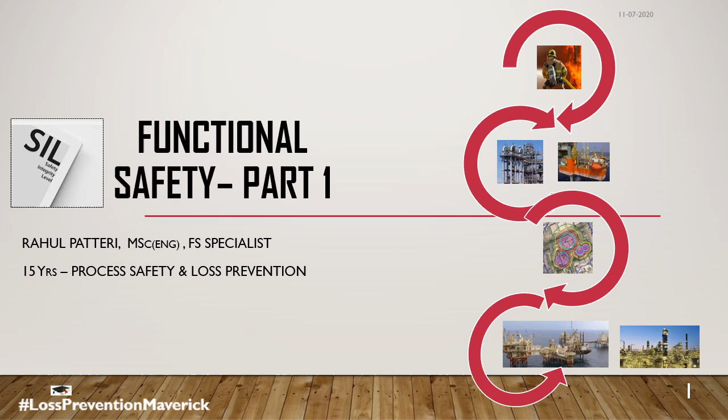So in this functional safety series, we would be talking about some safety concepts. We would be looking into an introduction to functional safety, certain things like LOPA, safety instrumented systems, SIF, the standards 61508 and 61511, what is SIL, that is safety integrity level, and certain salient features of the same. So part 1 of this lecture, we would be talking about these.

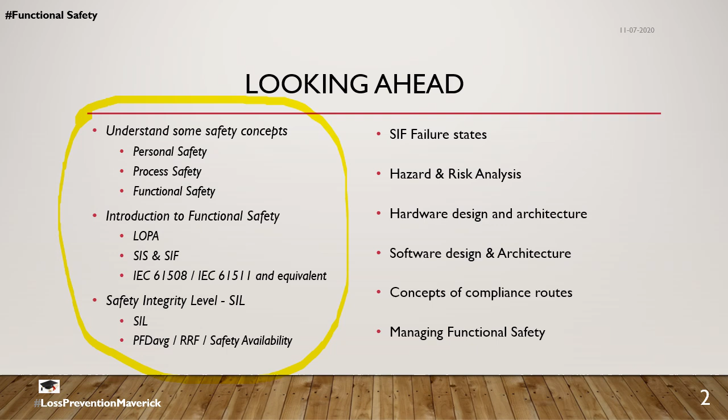Further, I hope and intend to make videos on SIF failure states, certain hazard and risk analysis, hardware design and architecture, software design and architecture, certain compliance routes that the hardware and software are subjected to as part of the standards, and how to manage functional safety. So now let's understand some safety concepts.

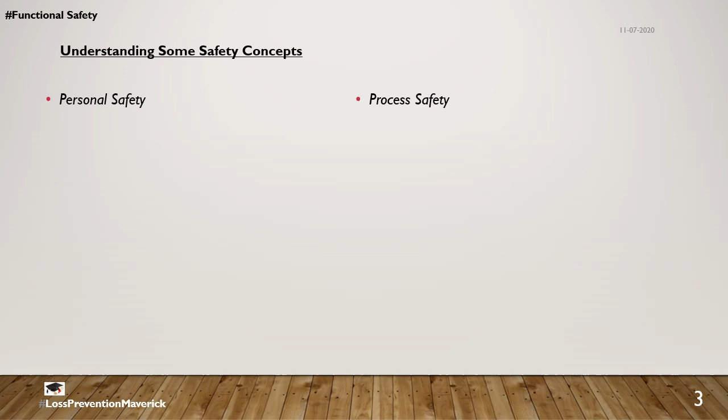So starting with personal safety and process safety. What are the differences between them? Personal safety talks about slips, trips and falls, whereas process safety talks about loss of containment. When the hazard which is supposed to be inside a pipe, called a primary containment, is outside of its primary containment, it is called a loss of containment, and the effects could be fire, explosion and toxics.

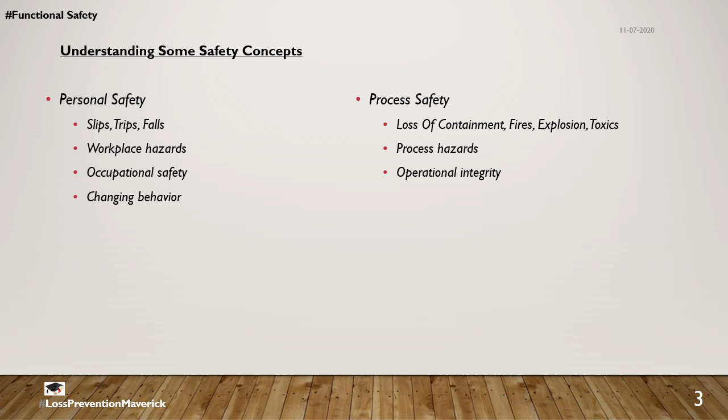Personal safety talks about workplace hazards, whereas process safety, as the name suggests, is about process hazards. Occupational safety is a subset of personal safety, and here operational integrity, people have also heard about asset integrity, is a subset of process safety. For continually improving personal safety, we have to have measures like behavioral management, behavior based safety is also being said. And for process safety, it's about changing the environment, the conditions.

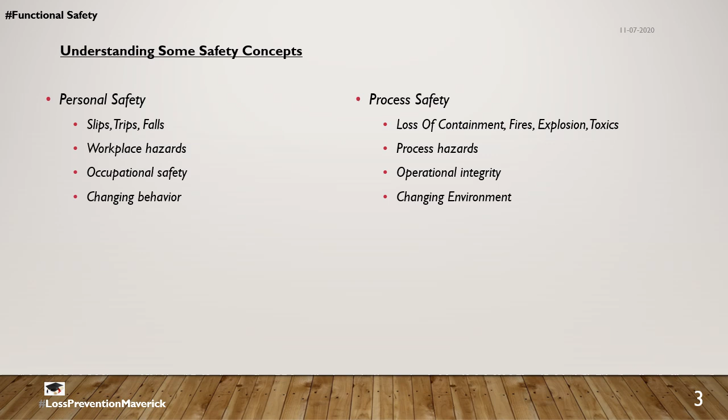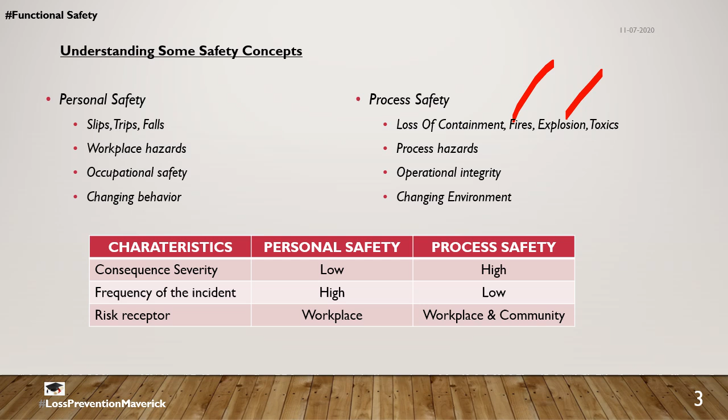If you look into the characteristics of personal safety versus process safety, personal safety has a low consequence, but it is very frequent, and the risk receptors are mostly within the workplace itself. If there is lifting and something happens, the consequence would be relatively lower, and the risk receptors are all those within the boundaries. Vis-a-vis process safety, fortunately it's not so frequent, but the consequence is quite high. Like we've seen, if it's a fire or an explosion, it is not something that will be confined within the workplace, but it can also go to communities.

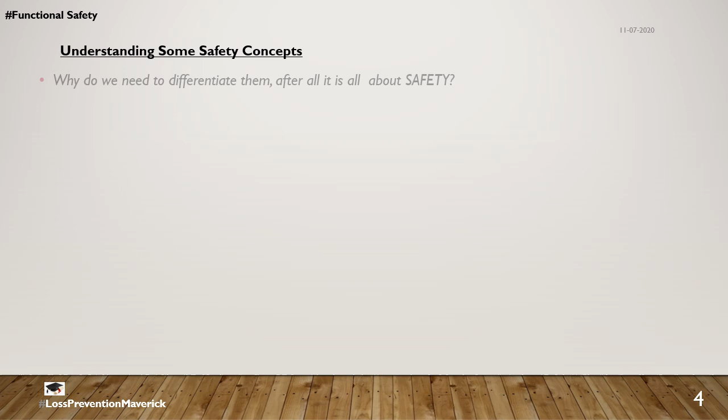So to continue, why do we need to differentiate after all? It's all about safety, isn't it? Well, this distinction is important because it has to be managed differently. When it comes to personal safety, usually it is something that we've heard about as the HSE management system, and it's focused on lifting, road safety, industrial hygiene and health, etc. And the risk assessments are mostly in terms of job safety analysis, permit to work, task risk assessments, etc.

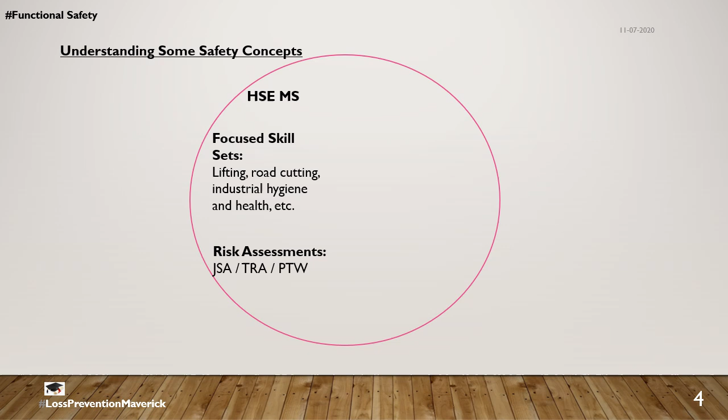Whereas for process safety, it's called process safety management. And the skills mostly looked into are ISD, which is inherent safe design, HAZOP, LOPA, that's layer of protection analysis, consequence modeling, etc. The risk assessments here are termed as QRA, FRA, emergency evacuation risk assessment, EERA, etc.

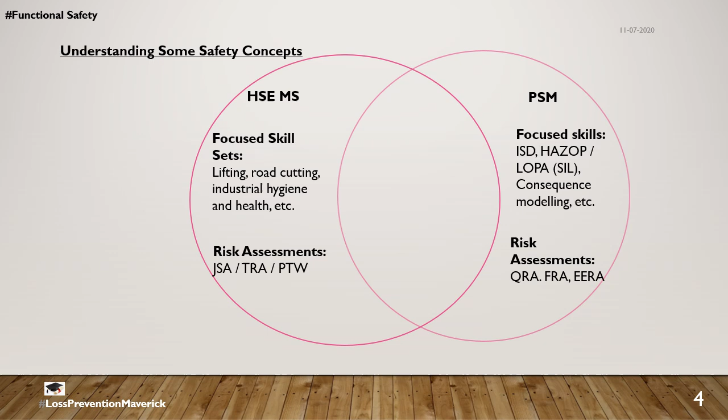Well, process safety and personal safety have certain common factors. For example, both of them need effective leadership. They both depend upon the culture that the organization portrays. There are incident investigations for both of these. Everything has certain measurements, certain KPIs, certain metrics to continually improve and look forward to. And there is verification and audit for both personal safety and process safety.

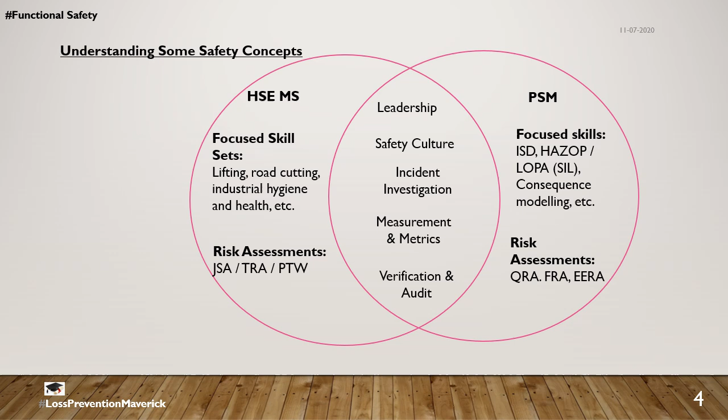Now, having had a flavor of the basics about personal safety and process safety, we come up to a hot topic. What is functional safety? In accordance with IEC 61511, which is the standard for functional safety of safety instrumented systems in the process industry, the definition is: part of the overall safety relating to the process and the BPCS, which depends on the correct functioning of the SIS and the other protection layers.

Honestly, reading that, I didn't understand anything. But then I came across Dr. Michel Houtermans of Risknology in his book called SIL in a Nutshell, where he defines functional safety as a property of an active safety function carried out by a safety system. An active safety function detects some kind of undesired situation and then takes action.

So what we have understood here is that functional safety is a science, or a property, wherein some sort of safety function is carried out by the safety system. What it does is avert some undesired situation. In order to avert an undesired situation, a system takes some kind of action, an active safety function, and this particular science or property is called functional safety. Well, let's see it with an example.

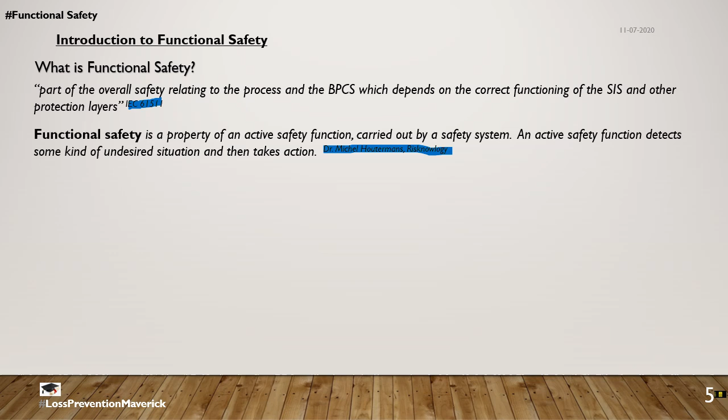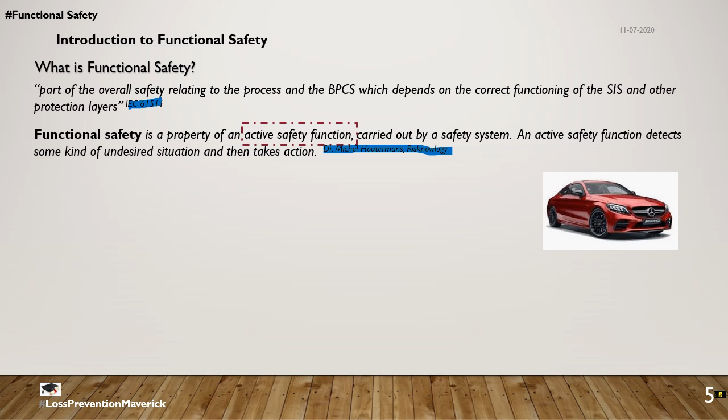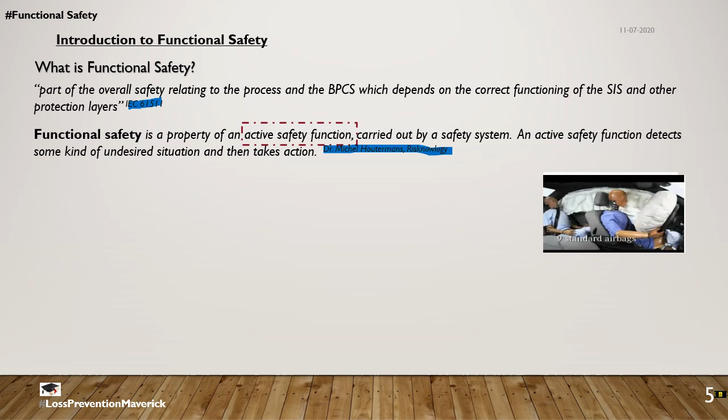What is the undesired situation that we very frequently come across on the streets? Yes, indeed. The undesired situations are accidents and loss of life because of the impact of these accidents. So what is the active safety function here? As soon as the instrumentation, the microprocessor chip inside the car, gets a signal of sudden deceleration, the airbag pops up. The airbag pops up, and what does it avert? It averts a potential fatality of the person at the wheel and the passengers.

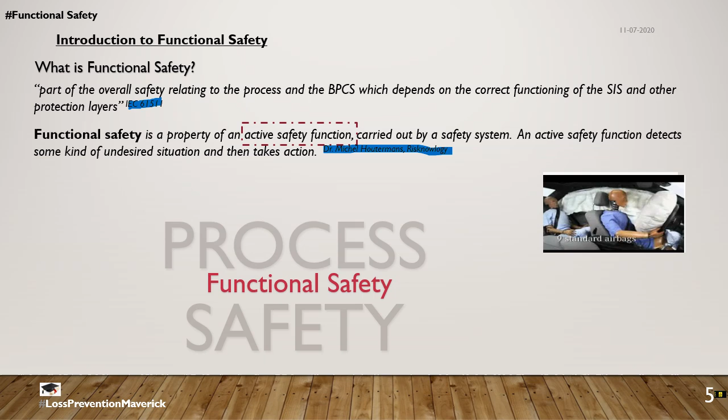So if we really look into the concept of process safety, I have to come to the conclusion that functional safety is also a subset of process safety. We've seen personal safety and process safety. There are certain common factors between personal safety and process safety, and functional safety is in fact a subset of process safety.

Having seen personal safety, process safety, and having understood that functional safety is a subset of process safety, now let's look into something called layers of protection, or like we previously saw, layers of protection analysis, or LOPA. Every process system has various layers embedded into it to ensure that the hazards remain contained inside the pipes, or, in the uneventful scenario that they come out, so-called loss of containment, the risk from the hazard is mitigated and not escalated, such that the risk is ALARP, as low as reasonably practicable. So to start with, the first layer of protection is called inherently safe plant design.

It looks into a lot of inherently safe design practices. Let's say the design philosophy is such that all the vessels, piping, related flanges and every piece of equipment in the process is designed for the maximum pressure that the system can see. For upstream, that is in wells, we can say it is designed for the well shut-in head, and for a pumping process, let's say it is designed for the pump shut-off head. So that is an inherently safe design feature.

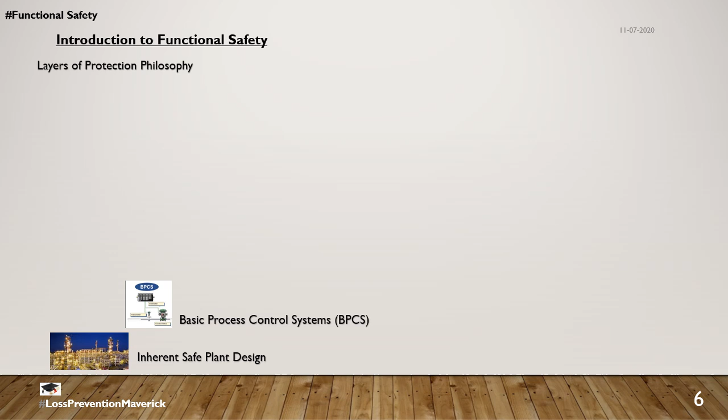The next layer is called BPCS or DCS. BPCS stands for basic process control system. The hint is in the name itself. These are control systems, instrumented systems which help in controlling the process variables. What are the process variables that we normally look into? They can be flow, level, pressure and temperature. Those instrumented systems which ensure that the process variables are under control are called a basic process control system, or a distributed control system, the DCS.

Now let's look into an event wherein you are filling up your tank. The tank is being filled, and then the level goes to a high level.

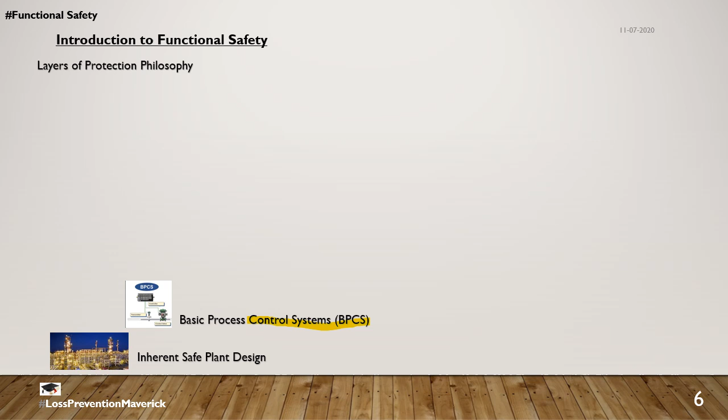So when that happens, the alarm goes off, and the operator is now cautioned, and the operator has to execute some sort of an action in accordance with the SOPs and his training. But then humans, yes, there are a lot of factors. It looks into what is his emotional state of mind at that particular time, how many alarms there are, what is the level of training, what is the level of fatigue. So this particular barrier can fail as well.

So once that barrier fails and the level now goes from high to a high-high level, the next barrier is called a SIS, or a safety instrumented system. So what is a safety instrumented system? A safety instrumented system is involved to ensure that there is some kind of an active safety function in it to avert an undesired situation. So what is the undesired situation over here? It is an overfill which could probably lead to a Buncefield incident. So in order to avoid that, the safety instrumented function averts it by shutting off the pump. It trips the pump, and therefore an overfill incident is averted.

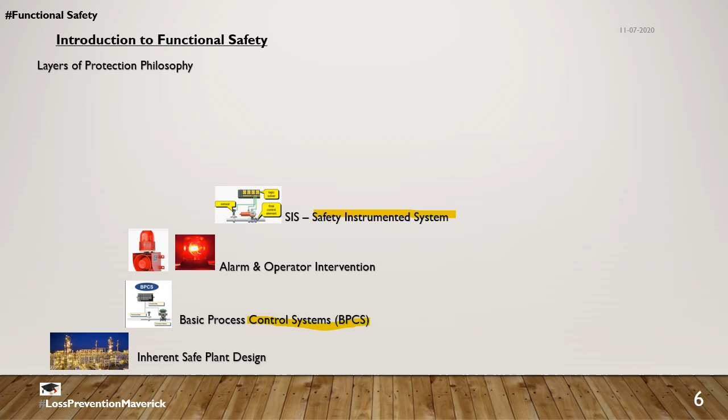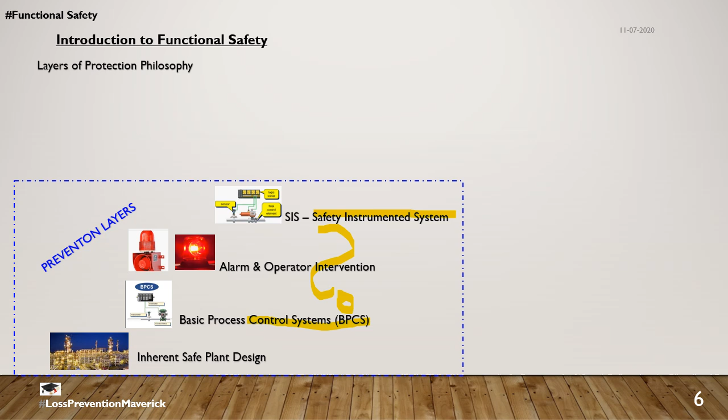So how is a safety instrumented function different from a basic process control system, or BPCS? Yes, the difference here is that the basic process control system is a controlling function. It can control against various variables, whereas a safety instrumented system is an executable function. It executes something, an on-off. So when an undesired situation is observed or identified, it shuts down the process, or it starts a process, it blows down the system, it ventilates the atmosphere, for example. So these barriers are therefore called prevention layers. And why are they called prevention layers? Because if these barriers are intact, the hazard is still in the pipes.

Now let's say that the safety instrumented system does not work, and when that happens, let's say the pressure goes up and it gets relieved from a pressure relief device, a burst disc or something like that. So in that case, the hazard which is supposed to be inside the containment is now released outside. As it gets released, the next level of barrier is a passive barrier, for example a dike. A dike reduces the spill of the fluid, and as it reduces, what it effectively does is reduce the surface area, and therefore less evaporation and less flashing fraction of the flammable fluid.

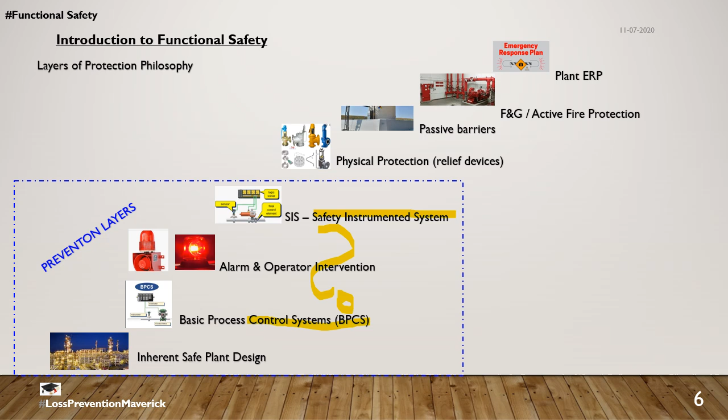The next level of barrier is fire and gas and active fire protection. So as soon as there is a loss of containment, the effectiveness of the detection is very important. And once detected, according to the cause and effect, probably it will start your fire water pump, and then there will be some sort of an active fire protection system in place, like energizing the deluge system, or maybe a foam deluge system, maybe some monitors activated, etc. Then once the hazard overshoots the active fire protection, the plant emergency response plan kicks in. You call up the fire service department if you have one, the fire trucks and the mobile units come rushing in, you have mutual aid people come in, and then they try to mitigate this particular event, and therefore it's called a mitigation layer.

So here in these layers of protection, we have seen prevention layers and mitigation layers. Prevention layers are those layers which ensure that the hazard is within the containment, and mitigation layers come into play or are activated once there is a loss of containment, and it is a property of these barriers to ensure that the escalation is mitigated as soon as possible with the lowest risk potential.

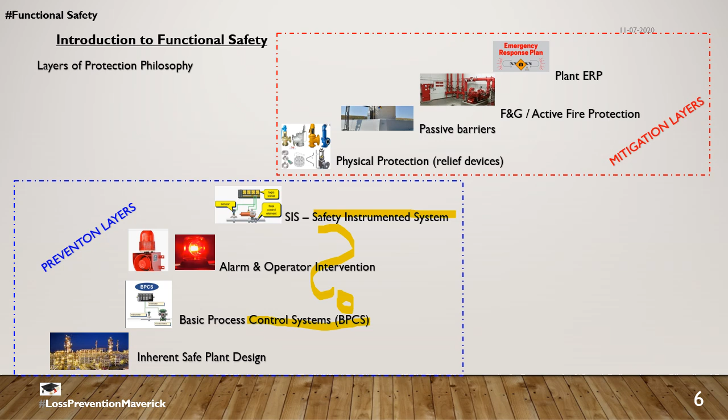Now we've seen LOPA, and we have addressed that of the various protection layers, SIS, or the safety instrumented system, is one of them. So here we see safety instrumented systems have been used for many years to perform safety instrumented functions. Yes, makes sense. But now let's look at them individually: safety instrumented system and safety instrumented function.

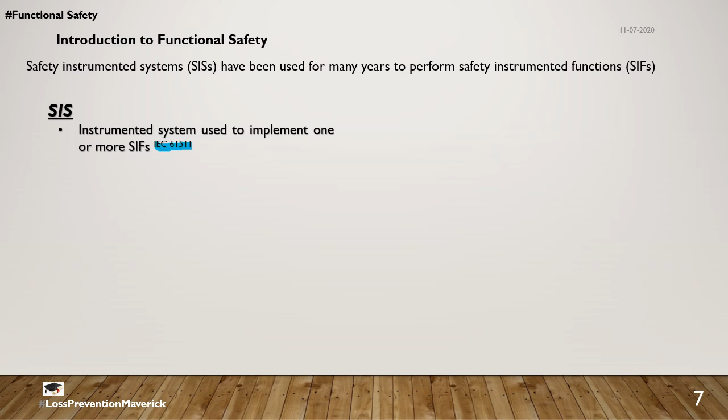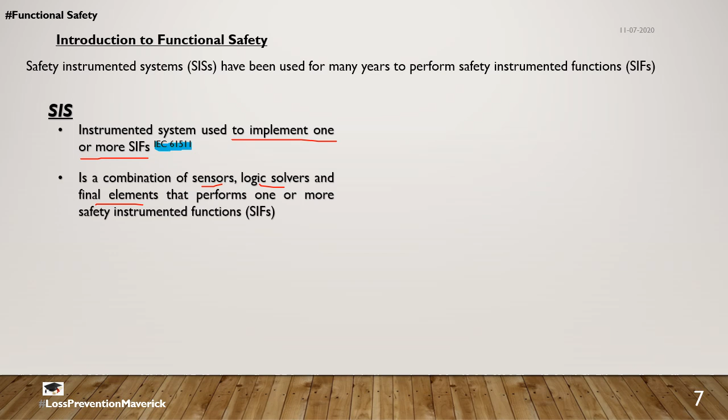So the safety instrumented system: IEC 61511 defines a safety instrumented system as used to implement one or more safety instrumented functions. So here please take note, it is used to implement one or more safety instrumented functions. A safety instrumented system is a combination of sensors, logic solvers, and final elements that performs one or more safety instrumented functions. So therefore here we come to know that a safety instrumented system is a combination of sensors and logic solvers and final elements which performs one or more safety instrumented functions.

A safety instrumented system, yes, always needs to start with an instrument. An instrument over here is a jargon used to indicate something or anything that can be adjusted, handled, or controlled. So a safety instrumented system, used to implement one or more safety instrumented functions, is a combination of sensors, logic solvers, and final elements, and it always has to start with an instrument. So that is a safety instrumented system.

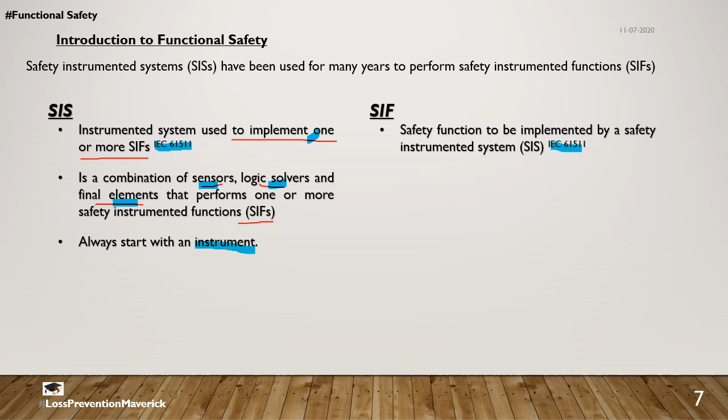Whereas what is a safety instrumented function? IEC 61511 comes to our help. It says a safety function to be implemented by a safety instrumented system. I mean, this definition is kind of an indirect association. For example, where's your house? Oh, mine is next to John's. And where's John's? Oh, next to you. So this kind of definition really doesn't give so much away.

So I looked into some other literature where a safety instrumented function was defined as a specific single set of actions and the corresponding equipment needed to identify a single hazard and act to bring a system to a safe state. So here we need to look into a specific single set and corresponding equipment. Which means a safety instrumented function is the equipment which has the action to avert an undesired situation. So a safety instrumented function is in fact a sensor, a logic solver, and a final element, all individual single ones which have a defined action.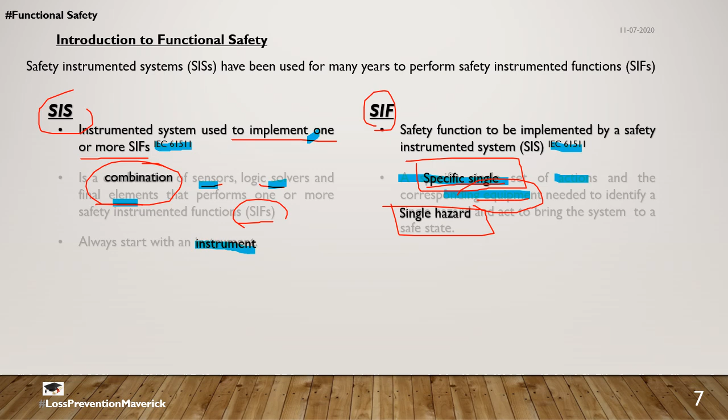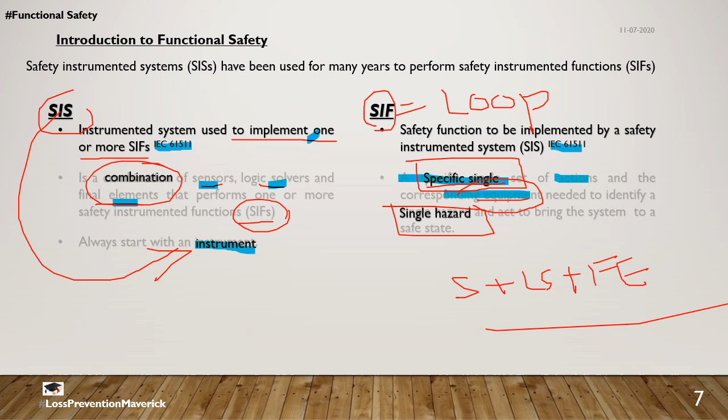So here, the thing that has to be highlighted is that a SIF is a specific single equipment for a single hazard, whereas a SIS is a combination of the various SIFs, and a SIS has to start with an instrument. A SIF is also called a loop, and a loop means the equipment which involves a sensor, a logic solver, and a final element. So this is what a SIF is, and a combination of SIFs makes a SIS. Having seen what a SIS and a SIF are, let's look into the schematics on how a safety instrumented system functions.

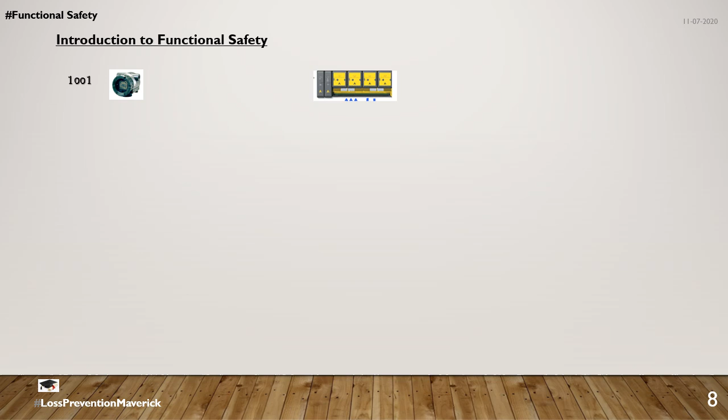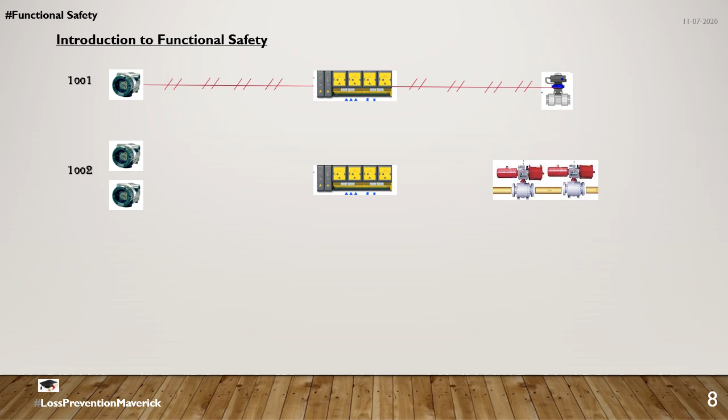What we said is that a safety instrumented system has to start with an instrument. So over here, let's bring in a 1 out of 1 pressure transmitter. The pressure transmitter is the sensor. It has a logic solver, and it also has a final element, and it is connected by a pneumatic signal. Now let's look into two other pressure transmitters which have their own logic solvers, and here it is executing a function to close two shut-off valves. One pressure transmitter is sending a signal to one logic solver, and the next one is giving a signal to the next, and both of them are giving actions to shut off the valves. Here we see that these are hydraulic symbols, connected by hydraulic linkage.

Now we get three other pressure transmitters with their own logic solvers, and again another two shut-off valves. The earlier ones were pneumatically and hydraulically linked, but here it is all about electronics. So these are all electronic connections. Each of these pressure transmitters gives signals to the logic solvers, and those logic solvers have a logic on particular predefined conditions to shut off the valves. So over here, by the definition that we've seen earlier, each of these is called a SIF.

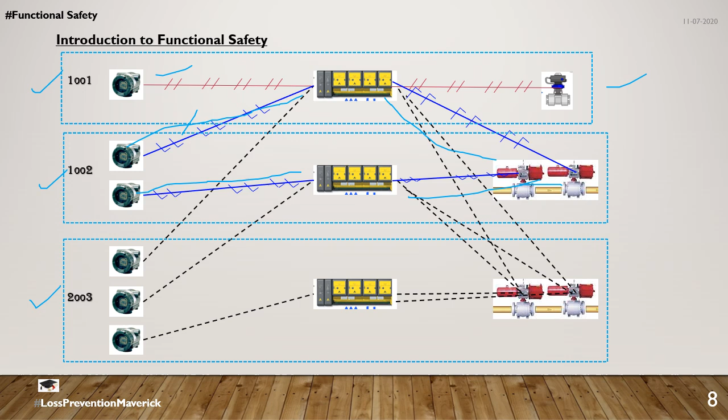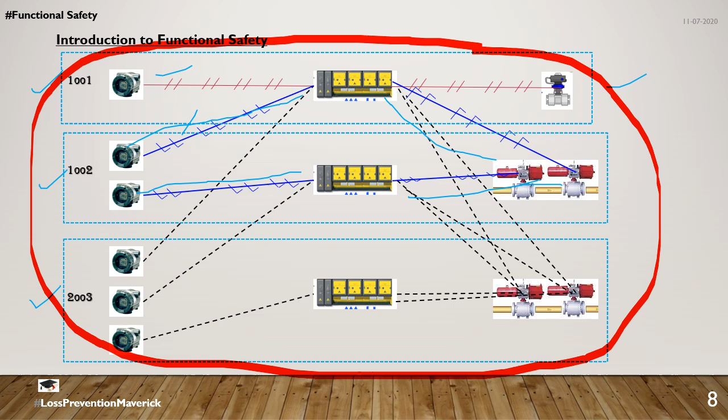Safety instrumented function, because there's always a confusion in the field of functional safety, between functional safety practitioners or HSE people, about what is a SIF and what is a SIS. So over here, each of these loops, that is one sensor, a logic solver, and the final element, has its own safety function, and this is called a SIF. And this is another set, also called a safety instrumented function, and this is another safety instrumented function. And now the combination of all these safety instrumented functions brings what? Yes, I guess all of you have guessed it well. It is a safety instrumented system.

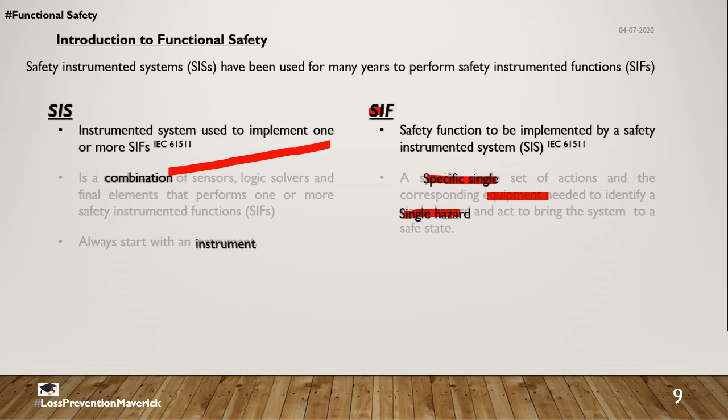Now we come back to the SIS and SIF definitions, and my apologies for harping on this particular definition, because it's very important that we understand and start to distinguish between SIS and SIF. So what we've seen is that a SIF has a specific single set, as a loop which consists of a sensor, a logic solver, and a final element, which has a function to avert a single hazard. And a combination of SIFs is a SIS, and the SIS has to start with an instrument. Now, how many of us have heard about this word called safety integrity level? Yes, most of us have. It's called SIL. So now, should a SIL be for a SIS or will that be for a SIF?

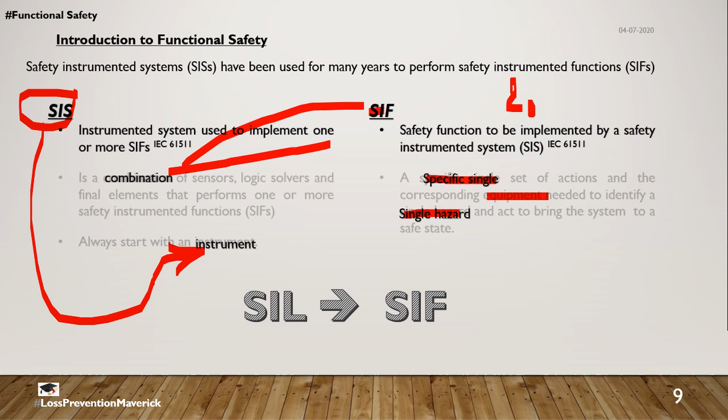A SIL is in fact for a SIF. A SIL is for a safety instrumented function. Now, having understood what a SIF is, and having briefly seen that a SIL, safety integrity level, applies to a SIF, we will look into the two important standards that define the safety integrity level.

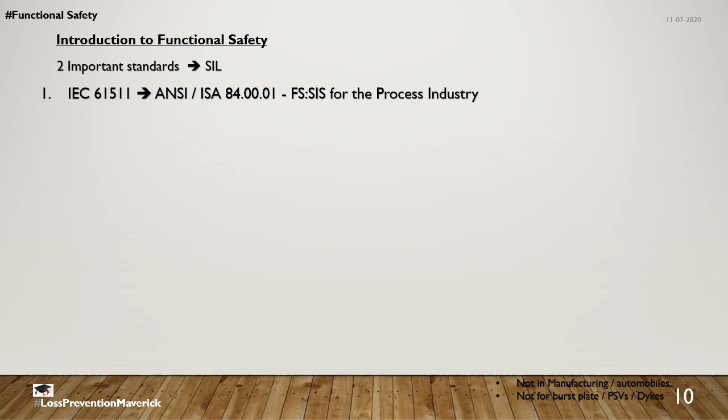The first one is IEC 61511, or its equivalent American version, ANSI/ISA 84.00.01. The title is Functional Safety for Safety Instrumented Systems for the Process Industry. So what do we see here? It is a standard that applies to the process industry. By definition, it does not apply to manufacturing, automobiles, and all those other industries.

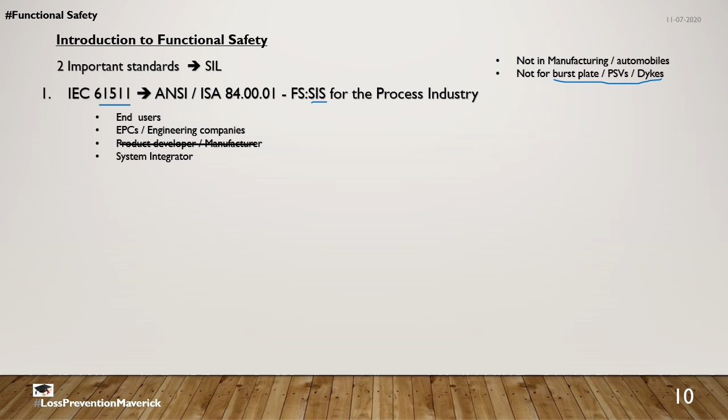And what have we seen about the safety instrumented system here? It has to begin with an instrument. Therefore, this standard IEC 61511 is not for burst plates, PSVs, dykes, etc. This standard is used by end users, EPCs and engineering companies. It cannot be used by a product developer or a manufacturer. In its life cycle, IEC 61511 is used by end users, EPC companies and system integrators, and it cannot be used by product developers and manufacturers.

Why? Because it's a loop standard and not a device specific standard. What does a loop standard mean? It means it comes into play once the sensor, the logic solver and the final element are manufactured properly and put into configuration. Therefore it is not a device standard but a loop standard. And as we all know, a safety instrumented system starts with an instrument and it is independent of the technology of the loop.

Earlier in our presentation, we saw the architecture of the safety instrumented system, where we saw three different safety instrumented functions. One was pneumatic, the other hydraulic, and the third electronic. So IEC 61511 is independent of the technology of the loop, as long as it starts with an instrument, and it is a loop standard and not a device standard.

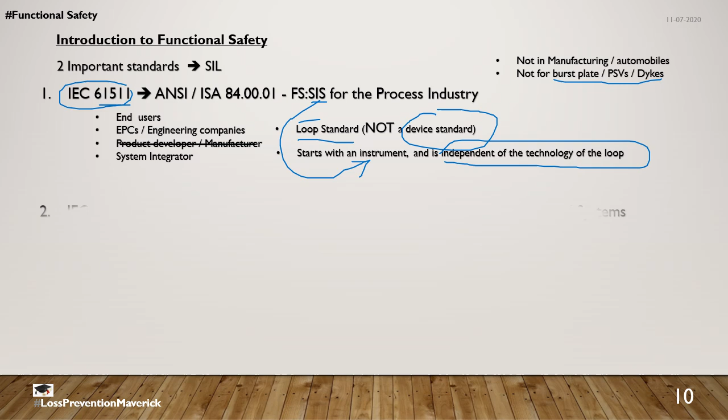Okay, so in that case, we need a standard for product developers and manufacturers, is it not? That standard is called IEC 61508. And what is the title? Functional Safety of Electrical, Electronic, Programmable Electronic Safety Related Systems. Here, there is no industry mentioned, and it is called a safety related system, not a safety instrumented system. So it can define any loop. Why? Because a safety instrumented system should have an instrument, whereas a safety related system can be anything. It can even be a push button to start with.

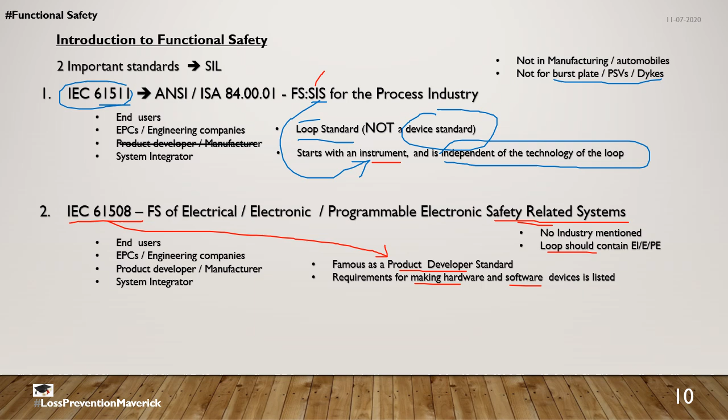That safety related system applies to IEC 61508 as long as the loop somewhere contains electrical, electronic or programmable electronic elements. This standard IEC 61508 is very famously called, in the process industry, a product developer standard, and it defines the requirements for making hardware and software. So is IEC 61508 only a product developer standard? Well, no. To be honest, IEC 61508 is the mother of all functional safety standards, and in its life cycle it applies to end users, EPCs and engineering companies, product developers, manufacturers and system integrators. The only thing is that in the process industry, we use IEC 61511 for its comprehensiveness, and for making the loop, IEC 61511 speaks to 61508 for developing the products. Once the products are developed, it makes them into a loop, and that becomes a SIF.

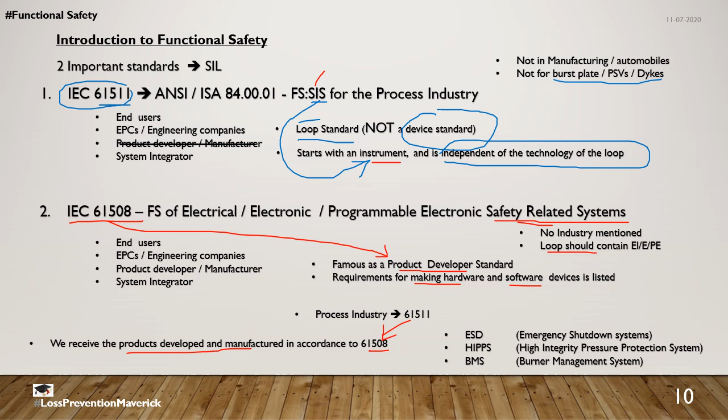Certain examples of SIF here are ESD, an emergency shutdown, HIPPS, a high integrity pressure protection system, and a burner management system. Let's come to the distinguishing features, or the differences, between IEC 61511 and IEC 61508. Earlier we saw IEC 61511 is a process industry specific standard and 61508 is a safety related system standard.

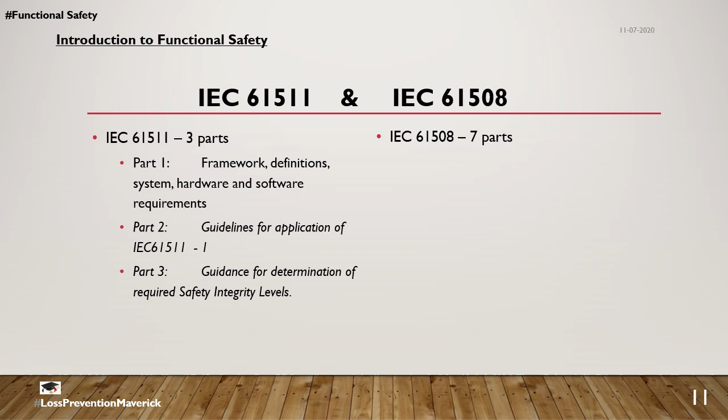61511 has three parts. Part 1 is framework, definitions and system hardware and software requirements. Part 2 is guidelines for application of 61511 part 1. Part 3 is guidance on the determination of SIL. Whereas 61508 has 7 parts. Part 1 is general requirements. Part 2 is hardware requirements. Part 3 is software requirements.

Part 2 and part 3 together give us part 6, which is guidelines for using part 2 and part 3. Here we also see abbreviations, hardware and software, so we need a part for definitions and abbreviations. Part 5 is examples of methods for SIL determination, and part 7 is an overview of techniques and measures. Now, when we write a scope of work and we are into contractual terms with an EPC contractor or system integrator or anybody in the life cycle, and we say that the third party has to abide by IEC 61511, it means the person is only obliged to follow part 1.

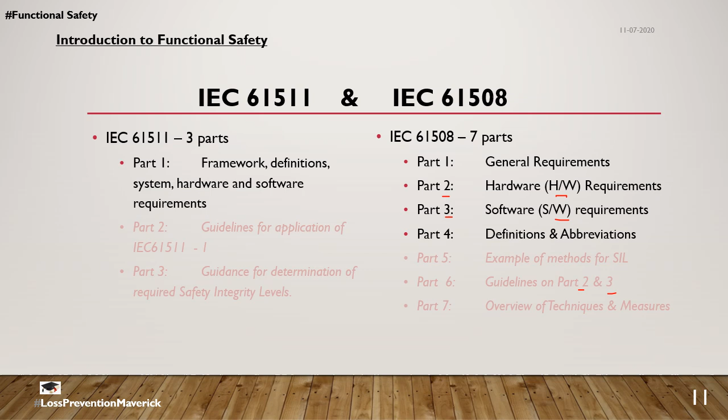Likewise, for 61508, he or she, or the third party, is only obliged to follow up to part 4 unless and until specified. IEC 61508 is also called an umbrella standard. Why? Because it defines the requirements for safety related systems in the process industry. It can be in the nuclear power industry, it could be the automobile and automotive industry, also for application based

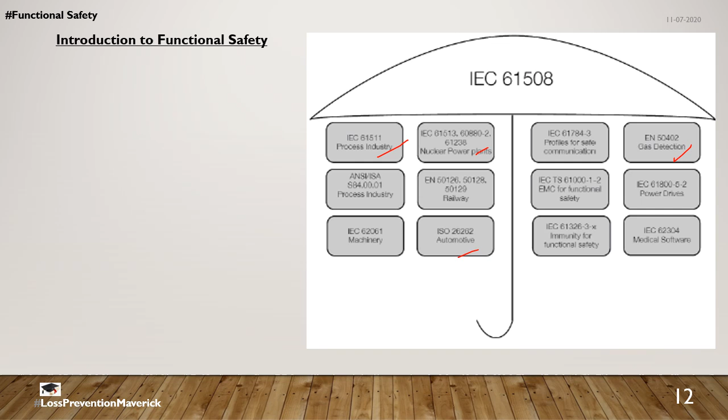functions for gas detection. So having 61508, 61511 is specific for the process industry, and it is also in 61511 when we need to have an architecture or a loop or a safety instrumented function having a SIL4 requirement, 61511 refers to 61508. This is for everyone's understanding.

And it is also to mention that 61511 doesn't stand alone. It has various connections or links to 61508, not only with respect to developing a product, developing the hardware or writing the software, but also if the need or the demand calls for SIL4, 61511 has to follow the compliance route of 61508.

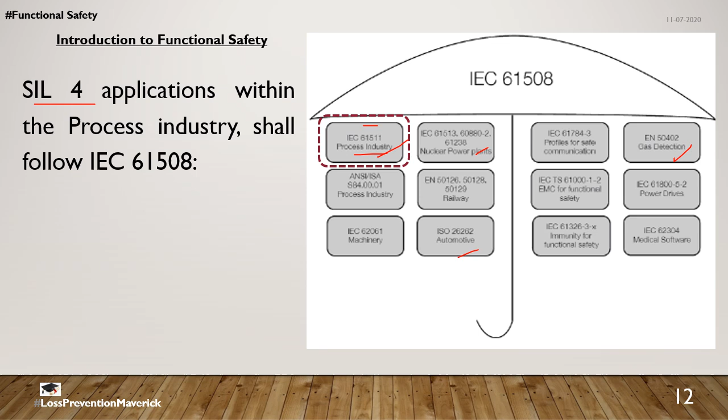Moving on to SIL, as we see, it's a safety integrity level. A little bit of a segue here. When I was in one of the campus interviews, the interviewer asked me, what is SIL? So instead of safety integrity, I said structural integrity level. I still remember that. And this was a time when design accidental loading and all that were not very prevalent or not very known, around maybe 16 or 17 years back. That's the case. A little bit of reminiscence.

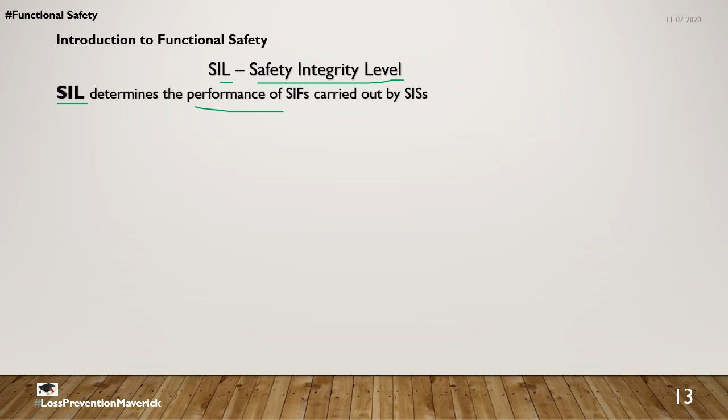Well, now moving on to our lecture. SIL, as we see here, determines the performance of SIFs carried out by safety instrumented systems. So here what it means, SIL determines the performance of the function carried out by the system. So it is some kind of a performance marker. So it's a function of the performance of SIF. SIL usually gives the layer of protection or the level of protection, and how much should be the level of protection, how well should be the performance of these SIFs is identified from hazard and risk analysis.

So what it does is, once you identify the hazard and you assess the risk and the analysis of the risk, that is how bad it is. So from how bad it is, we understand what is the tolerable risk. So from how bad to how good needs some sort of a risk reduction potential. So that risk reduction potential moves to something called a SIL. We will learn about all this when I make a video and share on the topic of hazard and risk analysis. So till then, let's see SIL.

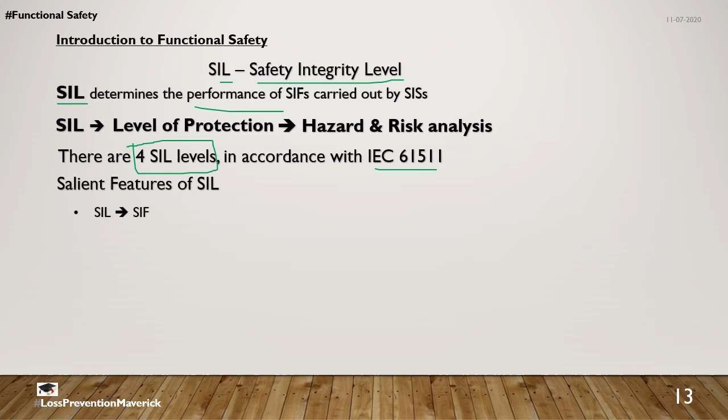In accordance with the standard IEC 61511, there are 4 SIL levels, as we just saw earlier, where we said that IEC 61508 is an umbrella standard, and IEC 61511, when we need to design a loop for SIL4, looks at 61508 for the compliance route. So 61511 has 4 SIL levels. So certain salient features of safety integrity level. As we have seen before, SIL is for a SIF. SIL is for a safety instrumented function and not for the SIS.

So SIL defines the performance of the whole loop, and we've seen loop means the sensor, logic solver, final element, or it can also be a SIF. So these are all synonyms. SIF, loop, all are synonyms, and SIL defines the performance of the SIF or the loop. And when we talk about SIL, when we talk about how much should be the performance of the level of protection,

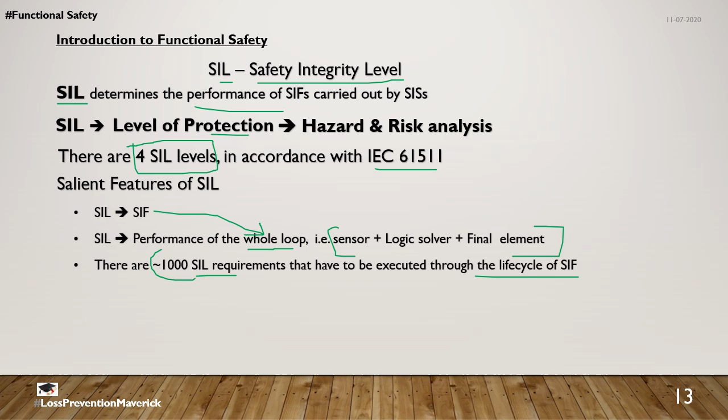there are nearly 1,000 requirements to be executed throughout the life cycle of SIF, which means from the drawing board, that is from writing of the specifications to design, to its configuration, validation, FAT, SAT, commissioning, operating the plant, and even decommissioning. So there are around 1,000 requirements for SIL, of which nearly 90% of these are addressed by the manufacturer or product development via IEC 61508. So nearly 900 of them is at a development level.

So these particular requirements can include technical as well as non-technical. Non-technical, for example, we need to employ competent people into designing the product. There should be a functional safety management. The particular work needs to be verified, and once it's in operation, the safety instrumented function needs to be audited.

Likewise, there are some non-technical requirements for SIL, and there are some technical requirements for SIL, like a particular way of configuring the particular safety instrumented function. Things like HFT, hardware fault tolerance, voting systems, and maybe level of diagnostics. All this we will learn in other lecture series. For now, let's understand that SIL, or these 1,000 requirements, have technical and non-technical basis.

So from here we understand, higher the SIL, better is the safety function. Yes, higher the SIL level, better is the safety function, and therefore better is the safety availability. Now, safety availability does not mean plant availability, which means that higher the SIL is not a measurement of how much your plant is available. Higher the SIL means how safe your function is.

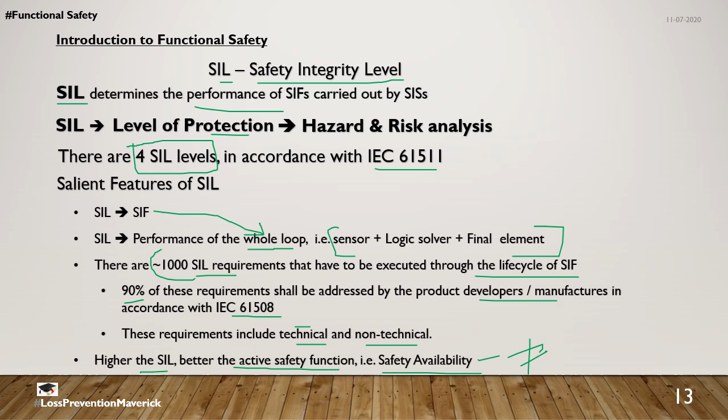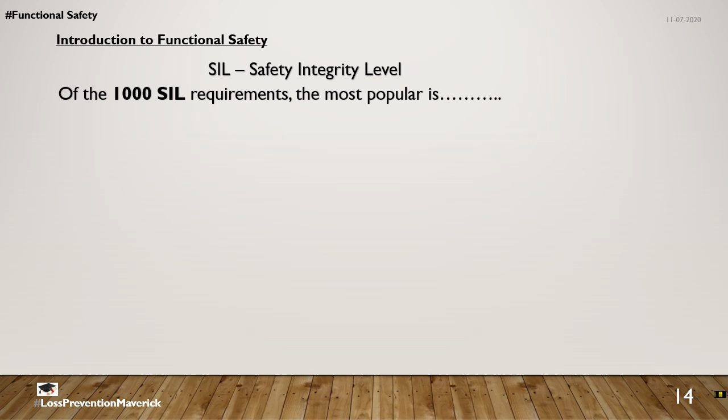So we saw what SIL is. SIL is a safety integrity level, and we've just seen that there are nearly 1,000 requirements for SIL. But of these 1,000 requirements, the most popular one is called PFD average.

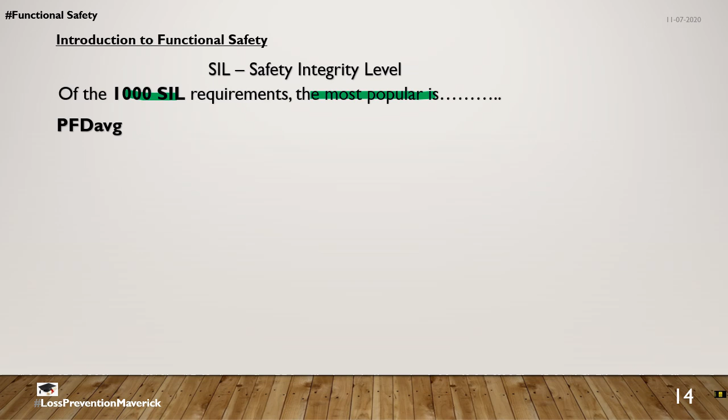Now, just to give an example on PFD and to talk about it, let's take a function over here, and that is about a person applying brake in an automobile, in a vehicle. Just for the time being, let's forget that we are in the 61511 industry. Now let's look into 61508, so there is no need for an instrument. It just has to be a safety related system, and somewhere in the loop we need an electric, electronic, or programmable electronic system. So here, as the brake is applied, there is some sort of a microprocessor which slows down the vehicle and brings it to a halt. And why is it needed? So that we do not go to an undesired event. What is an undesired event?

So now when we say PFD is equal to 1 by 10 or 10 raised to minus 1, here PFD means probability of failure on demand. So when we say that my braking function has a probability of failure on demand of 10 raised to minus 1 or 1 by 10, it means on 10 demands, it can fail once. So on 10 demands, when I press 10 times, it's okay, but on the 11th time, it could fail. So probability of failure on demand is 1 by 10 or 10 raised to minus 1.

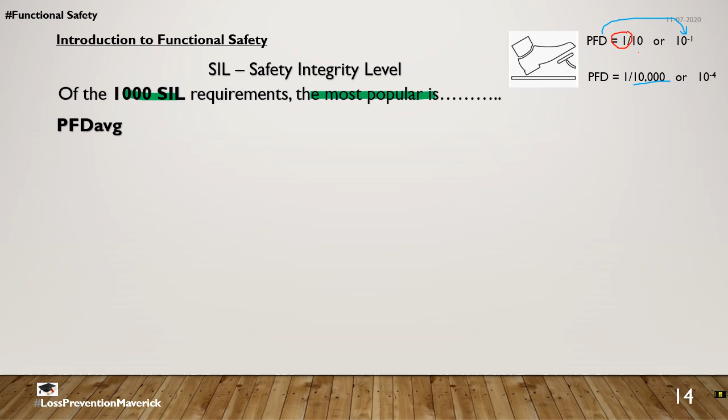But now, just to make things a little bit safer, looking into the accident potential, fatality and all that, I decrease the PFD to 10 raised to minus 4. So here, in order to have one failure, I need at least 10,000 demands. Just to say, if our probability of failure on demand is 10 raised to minus 1 or 1 by 10, to have one failure we need only 10 demands, whereas when it is 10 raised to minus 4, to have the same one failure we need 10,000 demands. So what do we know from here? As the PFD lowers, our safety function is improving.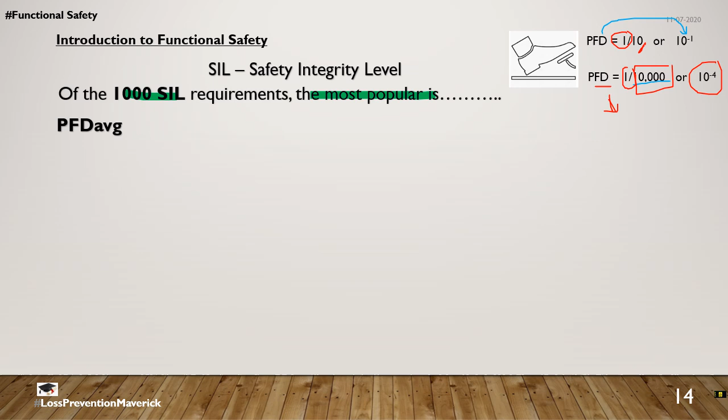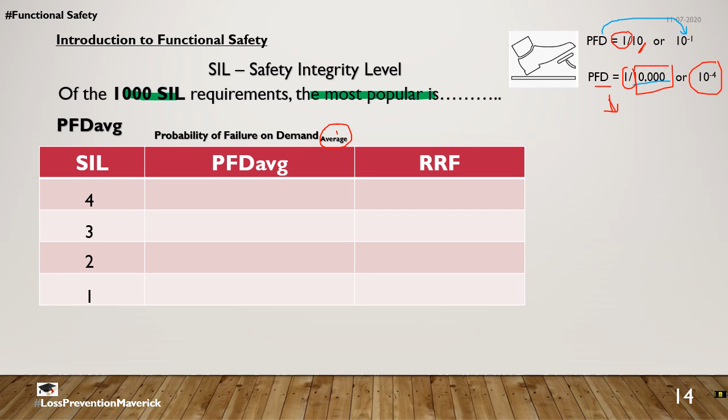So having understood so much, let's go back to the table, SIL and PFD average. So what is PFD average? Probability of failure on demand average. So why is it called average? It's a very good question, but let's halt it for now. It will come up as part of our other lectures where we will be talking about hardware requirements. So we have seen that there are 4 levels of SIL: 1, 2, 3 and 4. And of the 1,000 SIL requirements, the most popular one we see is probability of failure on demand average.

So for a SIL level of 1, the PFD is less than 10 raised to minus 1 but greater than 10 raised to minus 2. And likewise for SIL 2, SIL 3 and SIL 4. So here we've seen that as the SIL level increases from 1 to 4, the probability of failure on demand decreases from 10 raised to minus 1 up to 10 raised to minus 5.

So what is over here? It's RRF. RRF is called the risk reduction factor. And risk reduction factor is the inverse of probability of failure on demand, actually probability of failure on demand average. So over here, 10 raised to minus 1 inverse becomes 10 raised to 1. 10 raised to minus 2 inverse becomes 10 raised to 2. So a SIL of 1 means it gives a risk reduction factor between 10 raised to 1 and 10 raised to 2. And likewise for all the other SIL. So here we can see that as the SIL level improves, the risk reduction factor improves. And when the risk reduction factor improves, the probability of failure on demand average decreases because it's an inverse function.